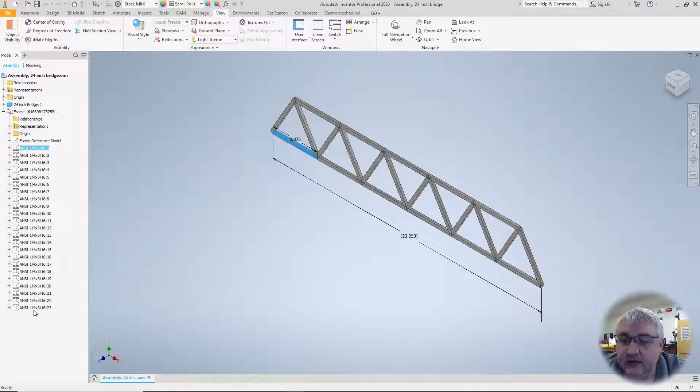So let's quickly go through how to set up your truss so you can print it and then have a one-to-one size drawing. One of the things when I showed you how to put the frames together that I just found out, one of the other kids showed me: if you go in here and you select all of your frames, so the individual parts that make up each of your frames, go in and say edit with frame generator. We did find a better size to use.

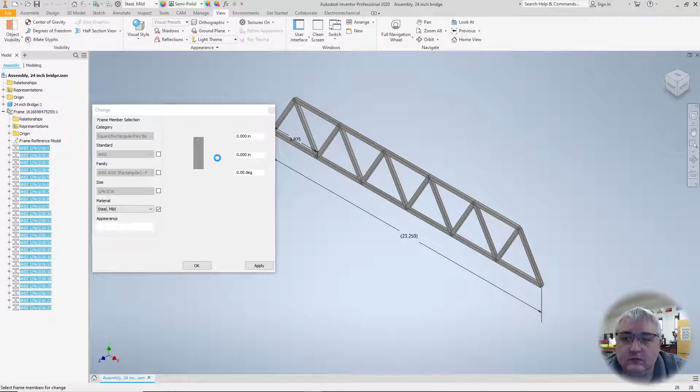So it'll take a second because my computer is incredibly slow. And before we were using the category of rectangular bar here. I pre-selected it, but it's unselected everything, so I'm just going to go back and select through everything again. And then remember to change it, I have to click the little check boxes to the side.

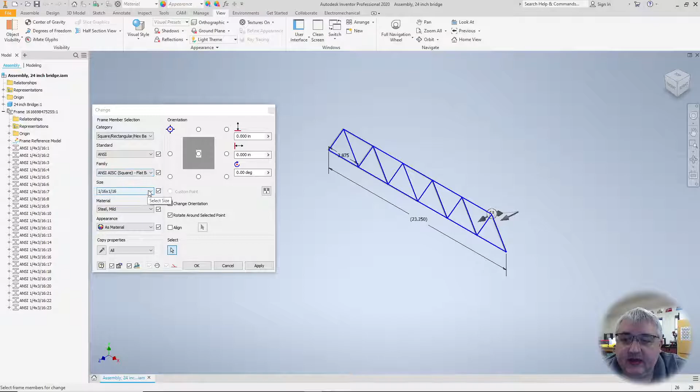So I'm going to go up here, and from rectangular, I'm going to change that to square, flat bar steel. Now you'll have a few more. If you start from the top, you're going to have a few more than the ANSI. But if you start at the ANSI, flat bar steel, that will let us go in, and you can see 1/16 by 1/16.

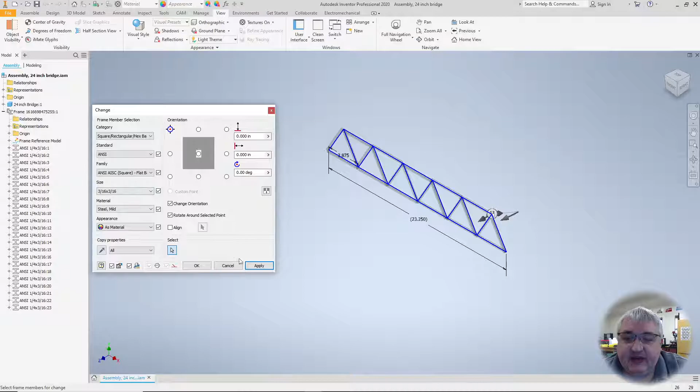But we have our material size, which is 3/16 by 3/16, or 1/4 inch by 1/4 inch, depending on which piece you're using. So we're going to go 3/16 by 3/16, which is what we used the last time we built trusses. All right, once you get that picked, hit apply. It's going to say you're changing all the members, and you're going to say, sure, I want to do that.

And then it's going to go through and regenerate all of these. All right, so now it's the size that you want. I'd pre-trimmed mine, and it's now untrimmed it, so it's doing a little bit of weirdness as to which side it's going on, but yours should be fine. You don't have to do that if you like the size you're in. It'll just make it so when you lay your piece of balsa down, it's the exact size.

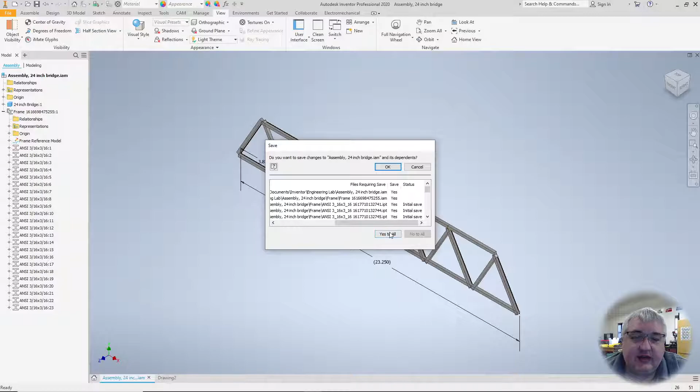All right, so then we'll go File, New, Drawing. Okay, and it's going to bring up the drawing. I'm going to go back here and just go ahead and save this, because it's going to want to know, hey, do you want to save everything? Yes, I want to save everything. And then go back to my drawing. And then I'm going to hit base, and it's going to drop my piece in there.

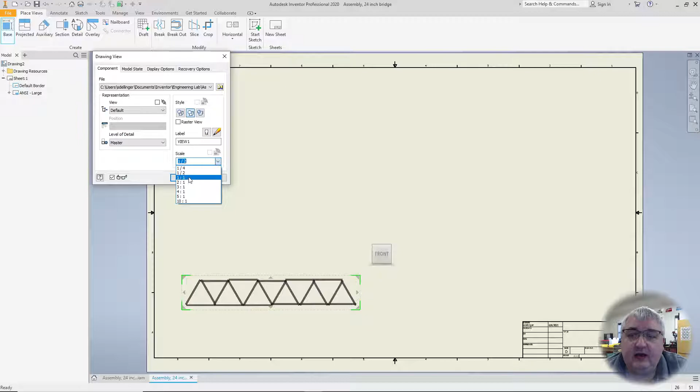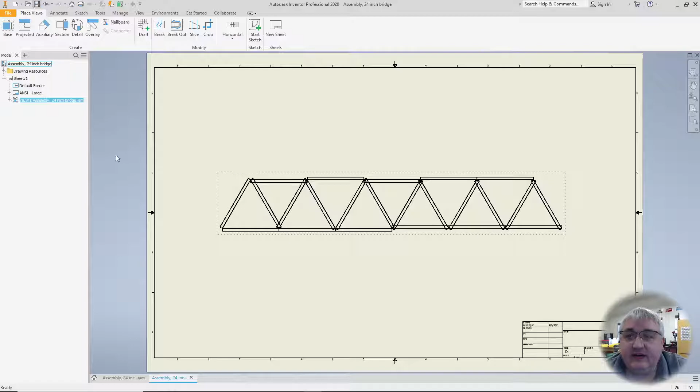Switch it to 1-to-1 to make it full sized. Hit OK, and then drag it. Notice when I redid that, it's messed everything up. Don't worry about that. This is how you get to the print. Okay, so I've got that set. All I need to do now is save it. So I'll call that assembly 24-inch bridge. It already exists because I tested this before, and it's saved.

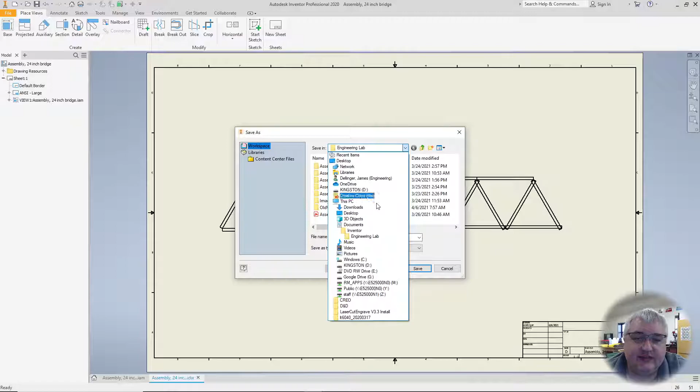And so now I can go File, Export, PDF. We want to write this out in a PDF. Make certain you know where you save this to. Right now it's going to Engineering Lab, which is not where I want it. It's much easier for me to get to, say, my downloads. So I'll save this assembly 24-inch bridge PDF in a known place, because you're going to have to go find this on your own. Hit save, and it's going to write that out as a PDF.

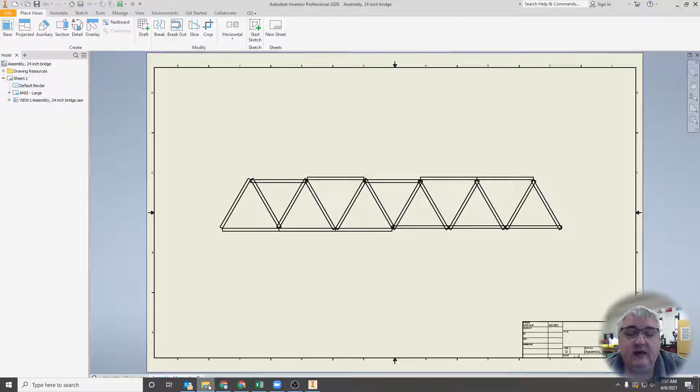Okay, I'm done with Inventor at this point. What I'm going to do is, if I go over here, open it up in the wrong thing, right? And I go to my downloads, I'll see my assembly 24-inch bridge. On the lab computers, if you just double click this, it's going to open it up in Microsoft Edge, and it's going to be a hot mess. You won't be able to print it to the correct size. What you want is Acrobat Reader.

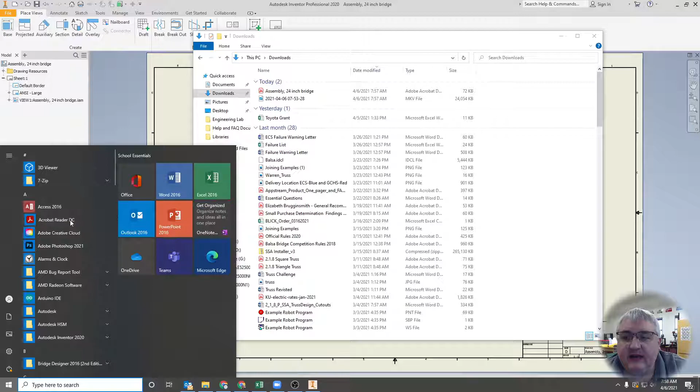So hit the Windows key, bring this up, and then you'll see it right here in the A's, and click on it. Now I have the full version of Acrobat. You'll have Acrobat Reader. This is here because I tested this earlier. But then just go File, Open. I'm in my downloads, assembly 24-inch bridge, open. And then there's your bridge.

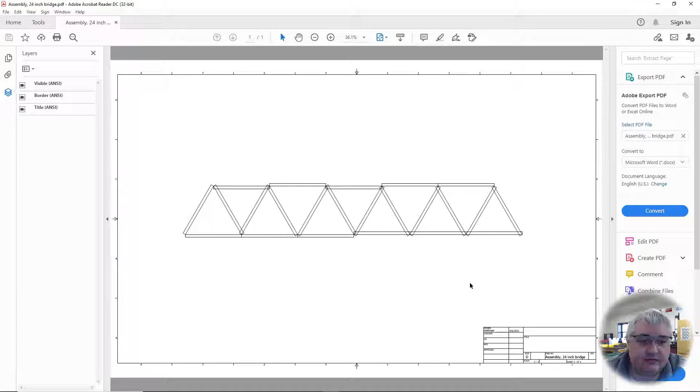And then all you have to do is go File, Print, and there's two things you have to change. Step back a second. Go over to the printer, plug it in. So you'll plug in the printer. Your computer will automatically discover and mount that printer. And then at that point, once the printer's all plugged in and your computer has recognized it, now you can go File, Print.

I think it's an HP 500. It should make this the correct one. Some people have noticed that it says something about Fourier. That's the one that's up the hall. You don't want that one. So make sure you get, I think it's HP 500. But just look on the printer, okay? So make sure this is set to the correct one.

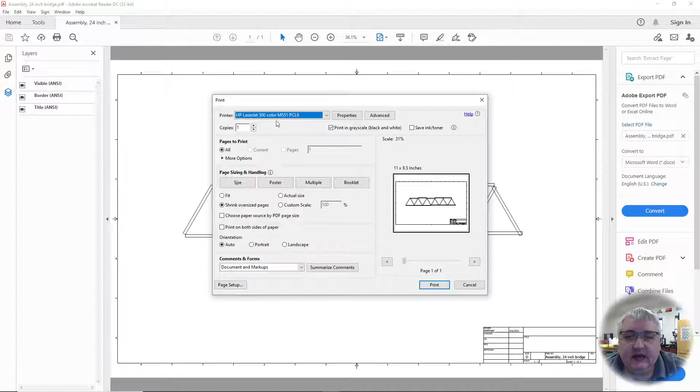Click on Poster, okay? And notice it's taking that drawing and dividing it up into 12 pieces. So once you click on Poster, it'll do this full size. And you can see the preview here. There's going to be 1, 2, 3, 4 pieces of paper, that's super critical to me. If you've made this too high, and it's going across 8 pieces of paper, it's worth the time to go and move it down and get it centered up, because it makes cutting it out and gluing it together or taping it together so much simpler.

The other thing, so you want to hit Poster, you want to click on Cut Marks, you want to make sure this is 100%. So correct printer, Poster, 100%, cut marks. What cut marks will do is give you some lines and you can take it over to the cutting board, and you want to cut the side off of these 4 pieces. Cut one side, the same side off each of those 4 pieces. You don't want to cut all of it because you want to be able to glue it together. Hit Print. It will go ahead and do its print thing.

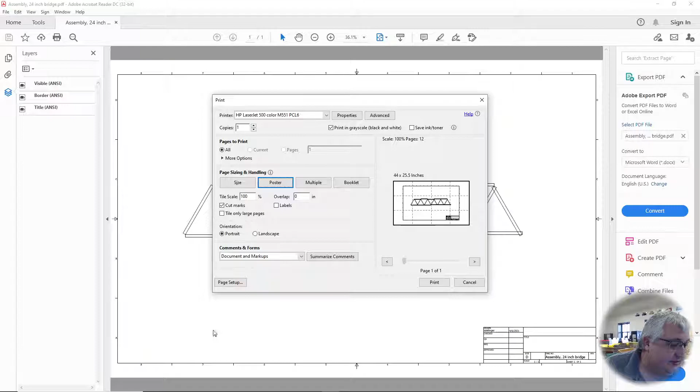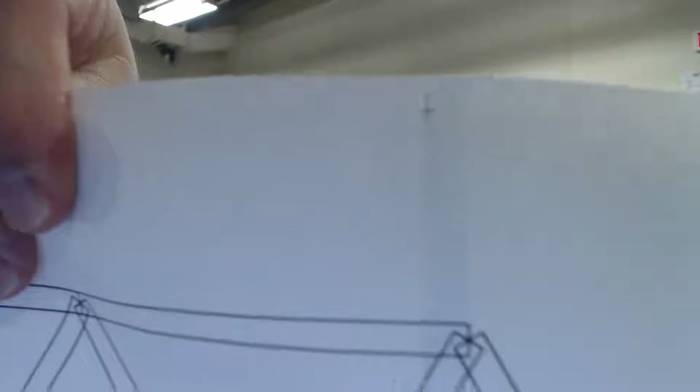And so what you will have when this is all said and done, I had this upside down, you will have a piece of paper that you have taped together. So you'll notice I've just taped it together on the back. And these are the cut marks that I'm talking about. So for each of these papers, I cut down the left-hand side cut marks, and then I put it together. If you cut both, then it won't overlap, and then it's much harder to tape.

But then you'll create that, and then you can take it and glue this to a piece of your cardboard. Use a hot glue stick or just some tape. Put some wax paper over top of it, and then you have a really solid thing to build your truss with.